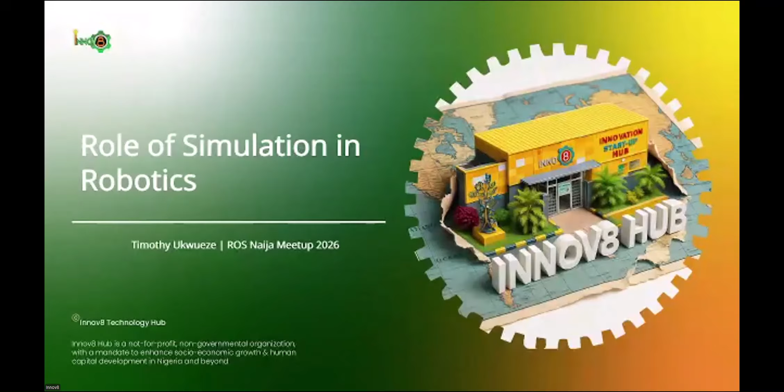So robots and simulation - first let's define what a robot is. At Innov8 Hub, the way we know robots to be is any device or machine that we build that can do the foundational paradigm, which is sense, think, and act. That means the robot should be able to perceive its environment, internalize that data, and make decisions based on the instruction given.

We also have simulation, which is not just tied to robotics alone. A lot of industries use simulation, from the automobile industry to construction to biology, like people in the medical field as well. We use simulation to model, test, validate, and get results.

But we're not talking about other kinds of simulation today - we're talking about robot simulations. As you can see, we're going to be covering some of the experiments we've been doing in the hub.

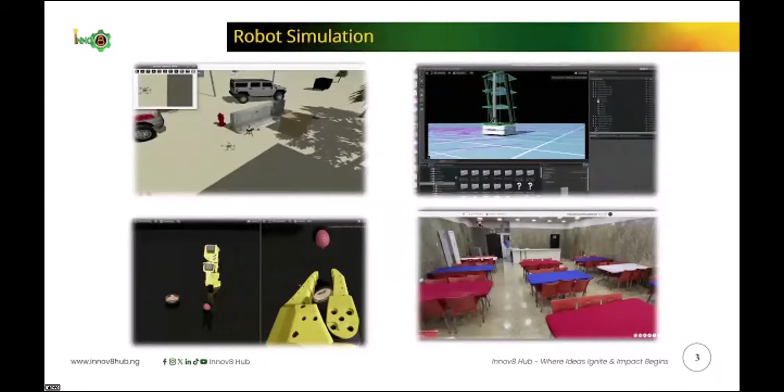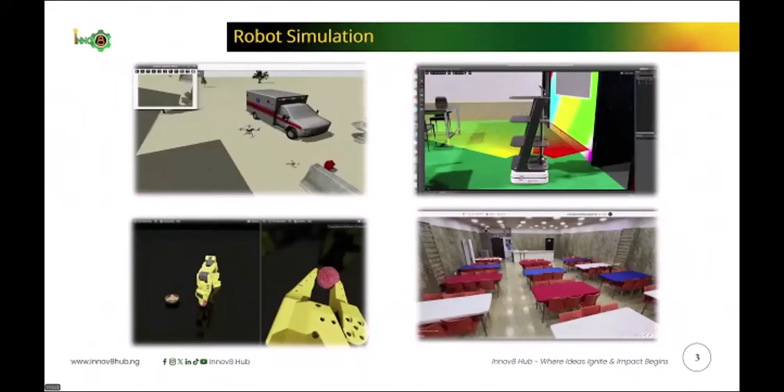Just to give a brief bio, I'm currently leading a simulation lab at Innov8 Hub, and most recently we started getting serious with robotics. Prior to that, we've been experimenting, so while I'm talking about the role of robot simulation, I'll be sharing some of those experiments with you.

Now, learning robotics - this is a meme I had to find because when I first saw it, I thought this is perfect. You see, this is the roadmap for almost every wannabe robotics engineer. The standard is: when you want to learn robotics, simulation is the easiest way to start. And when you start getting into mechanics and electronics, this happens.

Hardware is hard, and software is even getting more soft because of AI. So we are at that era where most people do this. How many of you are in this area right now? Don't worry if you are in that part - after this presentation, maybe you'll be going forward regardless of how difficult it is.

So before I move on to that slide, what I want to establish here is that it's pretty much easy to learn robotics using simulation. Why is that? Because, one, in Nigeria today it's even hard to get the hardware components. Maybe it's not about how hard the component is, but the time and money to get it to practice - that's a problem.

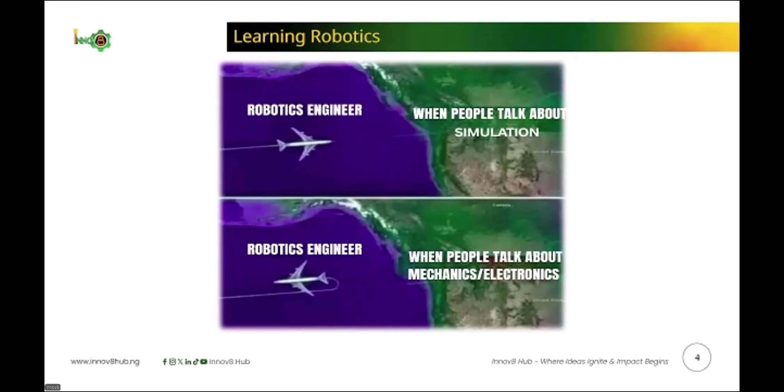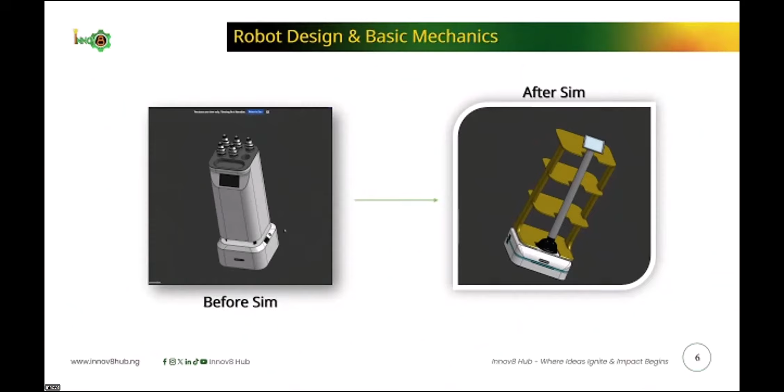I'm going to give you another scenario. This is another robot we were trying to design, similar but bigger. If you can see the older design, that was before simulation. The older design had that one caster wheel in the middle, but when you're scaling to this kind of platform and size, you find out that you have instability in the whole system. Now, as a good designer, you might intuitively know this, but you can actually validate it in Gazebo. We did. When we tried simulating this in Gazebo, we started noticing this wobble, showing us this is very unstable. That's why we went for a design with 4 caster wheels instead.

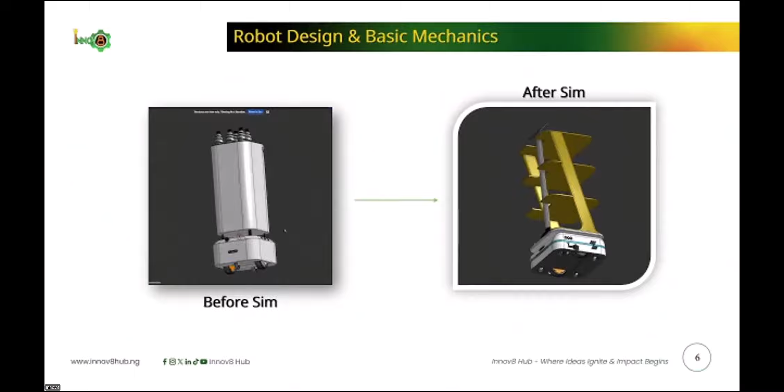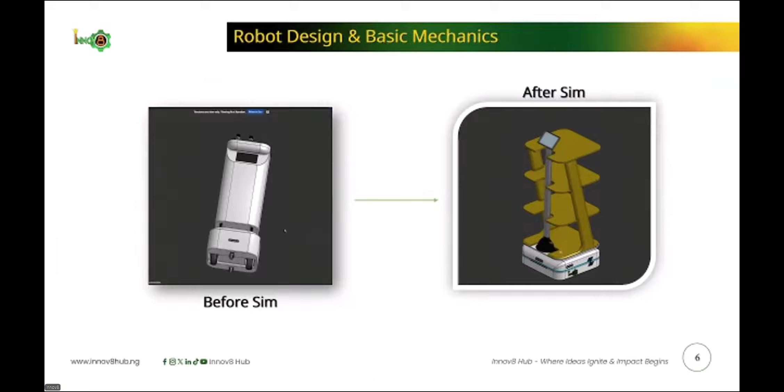So let's think about this. Maybe you were going to buy your components before doing this simulation. You've already selected 2 casters. You've already made a mistake. That means waiting for another 2 weeks if you're ordering from outside, or needing that specific size. So that's why for us in this part of the world, we need to be critical about the way we design, and we need to use the simulation-first approach. Okay, I'm not doing this fast enough, but it's okay.

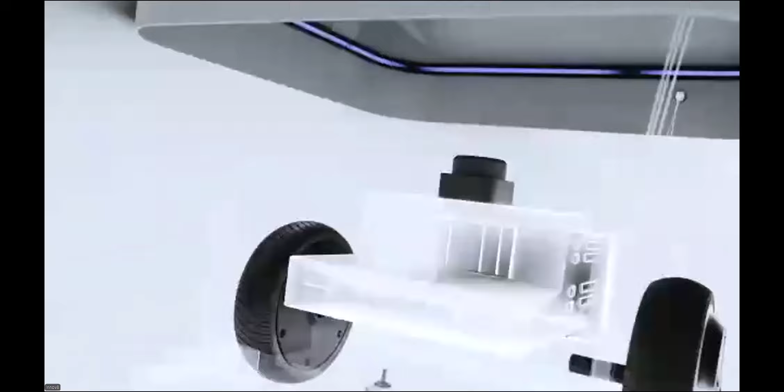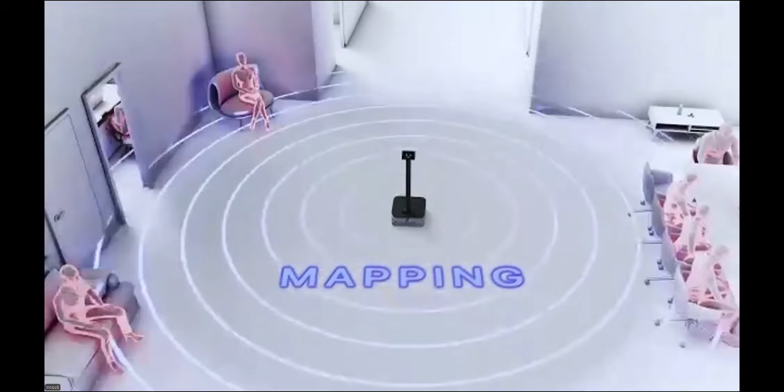I really wanted to show this video because it was an animation made by my team. We're introducing our robot that we designed specifically for office service activities. It's going to be a research platform, having different things that we're going to be testing, scenarios and what have you. It's going to do catering, patrolling, any function we can get out of it for indoor services. So you can have different modules for the payload.

Okay, so now, when you've built your model, robots are meant to interact with the real world. I mean, they're supposed to function in the real world, right? So in simulation, you can actually create that world and test those scenarios. That means you are not limited by the physical, you can actually go and explore.

And that next stage is where you actually start looking at world building in your simulation. This is one of the roles that simulation plays, where you can test all the interactions that you want to see in the real world. This can also inform you in a lot of ways, like sensor choice, height, position, what have you, because you need to validate all those things.

I mean, you can do it while you're buying your component, but I think simulating up to this extent might help you make better choices on the kind of components to get. Even the FOV of all the cameras is important to your scenarios.

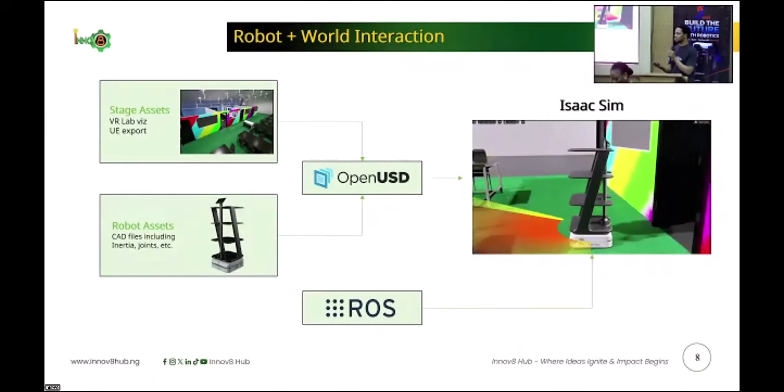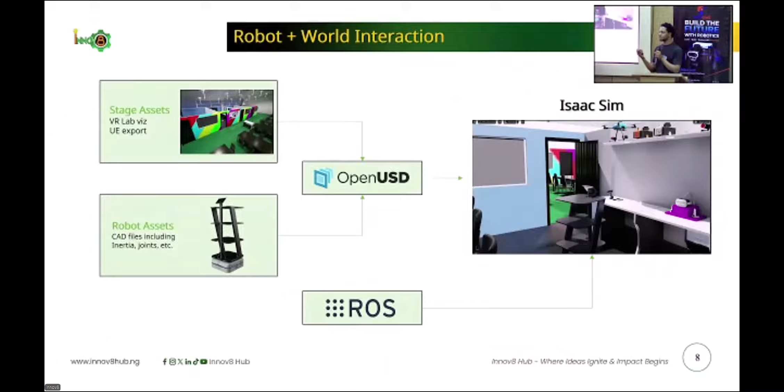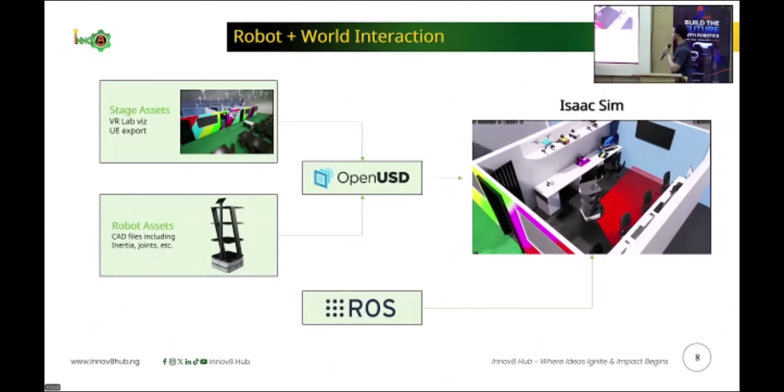This is also to tell you ROS is very important, because it helps you. The reason why they call it a plumbing system is because it actually helps you connect all the parts of your systems together, so it creates that network for you easily. That's why even if you're using Isaac Sim, most likely you have to use ROS to do your communication. So for control and everything, we use ROS. And so we'll move on to the next.

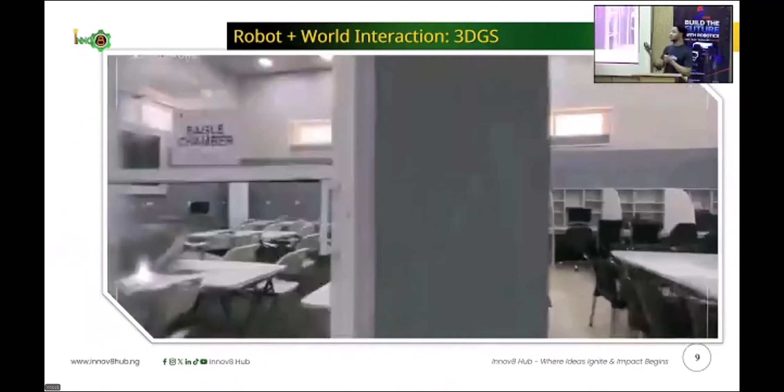All right, for world building, there are multiple ways. I mean, you saw one way, which is using already built assets for different use cases. You can model it by hand. You can actually use already made assets for different purposes and repurpose them for robot simulation.

But a new trend that is coming out is using 3D Gaussian splatting. It's a neural 3D reconstruction method, and this can quickly get you from taking pictures and scanning your environment to bringing it into simulation real quick. This actually opens the door to many things, because before we had to handcraft environments, assets, and stuff like that.

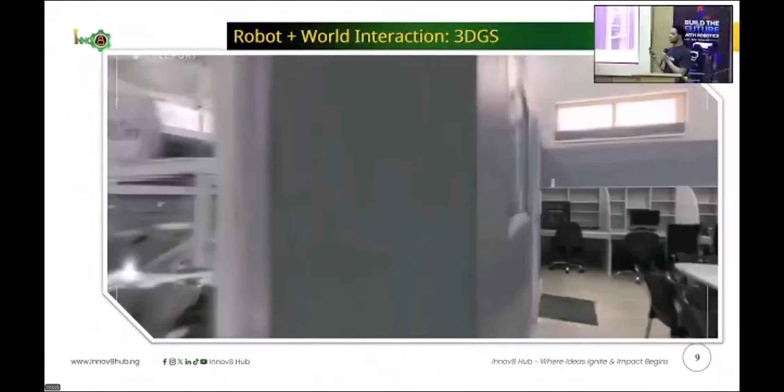With this, you can actually scan and get your world working in 3D. While it's still in the early stage, there's a lot of experimentation with regards to physics, lighting, and what have you. People are trying to see how they can utilize this method, because you want to be fast in your iteration cycle.

Yeah, so it depends on your inputs. The result you're going to get depends on your input. So if your camera is bad, you might not get a very good result, but you might get something ideal. Depending on your use case for Gaussian splatting, you will choose what device to use to capture.

You can use your iPhone, you can use a tablet, you can use specific devices, there are 360 cameras you can use. You can use high resolution cameras and stuff. Then there are specific cameras that have been built for 3D Gaussian splatting that you can actually get if you're feeling so rich.

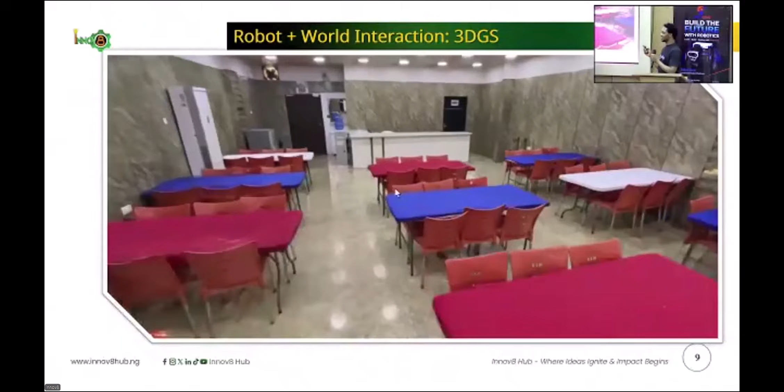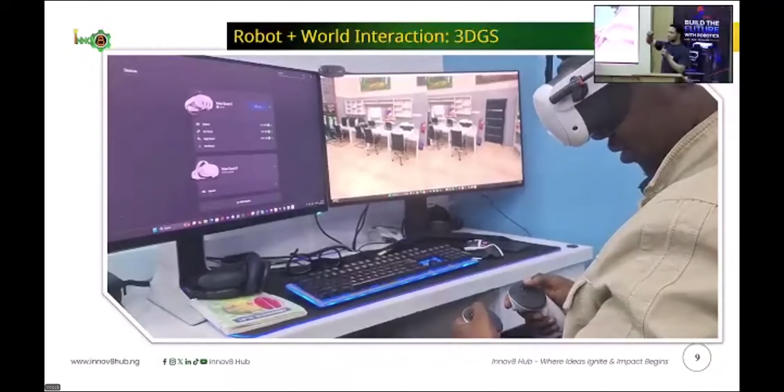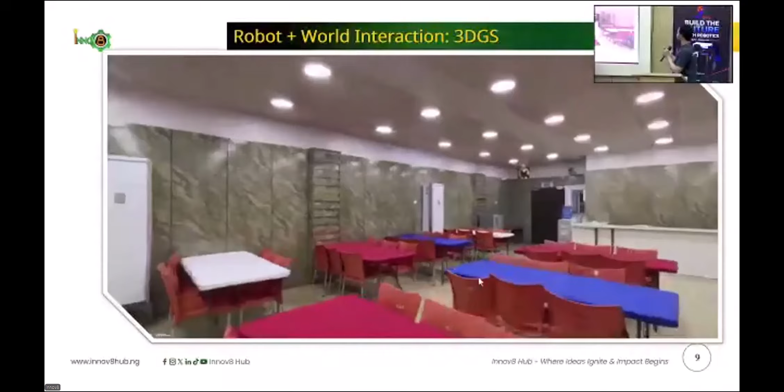Yeah, okay, for this one we used an iPad Pro to capture this. It was just a quick test. These are spaces that exist in this hub. The other one you saw was a cafeteria, while this one was one of our main spaces. It used to be the drone area, but it's okay. Well, that's basically it. There was a point I wanted to make, but I think it's okay, we can just move on. Maybe if I remember, I'll talk about it later.

So another use case, simulation - there's this AI trend, or hype, but there are real uses we've found for AI in robotics. We're seeing how it's enabling a lot of things, from perception to motion and whatnot. You can see here synthetic data generation, where you can maximize data collection in simulation.

Normally, gathering this data in the real world takes time, right? But now you can actually generate this - create simulated data, and annotate it. So you can start getting your dataset, training on the data you've gotten from the simulated world. You can even combine it with real world data to maximize efficiency. This has allowed us to scale AI training.

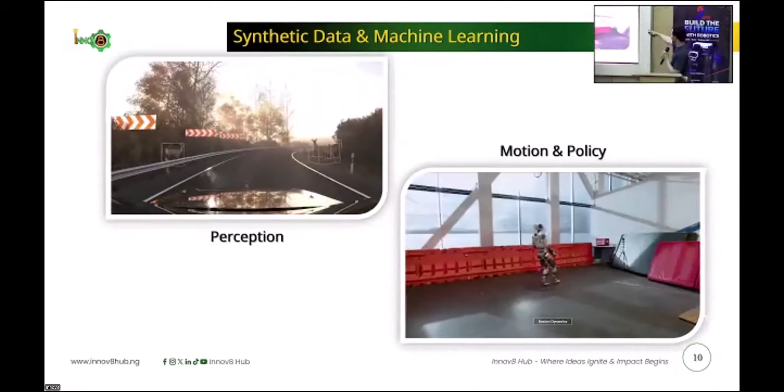We also have work for motion, where we talk about imitation learning, reinforcement learning, and all that stuff. You can see some work being done over there. With this, you can actually scale training - you can see this humanoid robot with multiple instances of it in training and simulation. This is how we scale. Something that would take like a billion years if you were testing with hardware will take like an hour using this framework. This is what simulation is doing in robotics today.

So AI has made simulation more important. If you're going to build an AI robot, most likely you're going to be using a simulator to train your models. I've never heard anybody say they don't use simulation to train AI for robots. I mean, there's a sim-to-real gap, where transferring all that learning to the robot is not so easy, because even though we can get enough of the physics and stuff, we cannot really ideally recreate real-world physics. The imperfection of the world, the imperfection of sensors, and all those things cannot really be created perfectly in simulation - that's where the gap exists.

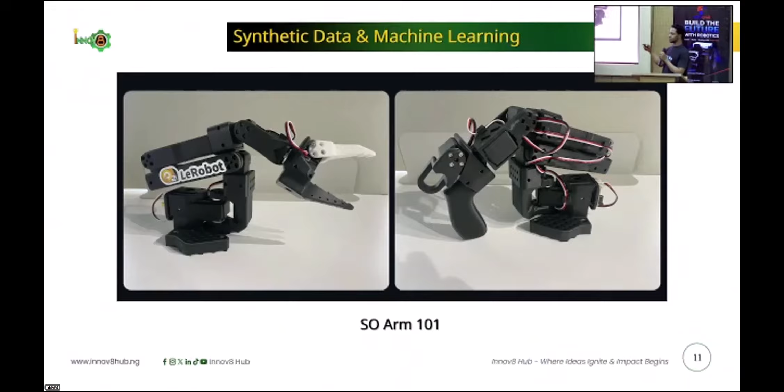So we are actually exploring things using this as well. You can do imitation learning, reinforcement learning, and all that stuff. So yeah, deployment - sim and real. You cannot be a perfect roboticist without having to deal with the real world. So you need to deploy, right? You need to be like these guys who keep going towards the hard problems to solve this.

So how many of you are willing to take this leap of faith? All right, anyway, so deployment - sim and real.

Okay, so there are ways to deploy, and you want to keep having your simulation in the loop as well, for multiple testing and whatnot. For instance, when I was trying to get into ROS 2, I built a platform for my own development, which I suggest everybody should do. You should not waste time taking too many tutorials - you should have a plan for projects you want to do and start working towards it.

Build something, maybe a miniature size or something like that. ROS allows you to use ROS 2 Control, which is like a package for interfacing and controlling your actuators and a whole lot of stuff. It offers the ability to have two-way communication between your simulators and your real robots. So you can easily test your ROS code, then test that in simulation. If it works, you deploy to the real robot to test as well. This is basically how this was actually done. So for deployment, always keep in mind that building in simulation, your end goal is to build in the real world as well.

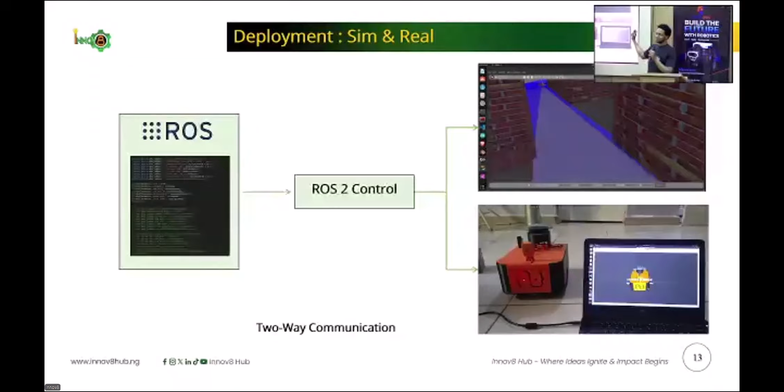There's a question on the Zoom chat: what is the headset and controller for in the 3DGS section? Just like any virtual world, virtual reality is a way to be fully immersed in a virtual world. We used it because 3DGS can be very lightweight for VR exploration. We just tested that in the demo. That was just a test for immersion, nothing to it, no robotic stuff.

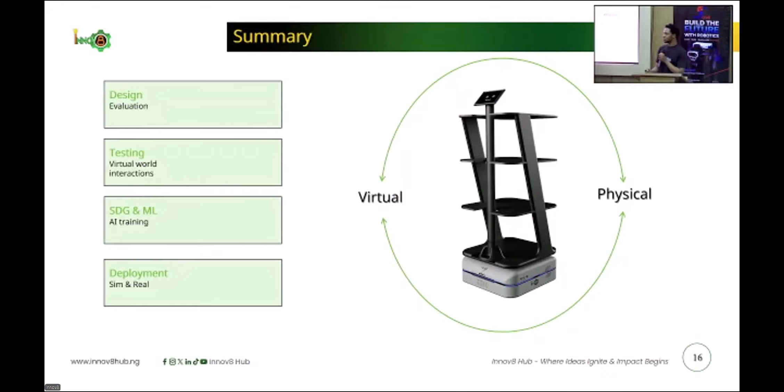All right, I think we are almost at the end. So, in summary, we've seen the role of simulation in multiple areas: design evaluation, testing as virtual world interactions where all your scenarios and behaviors play out, synthetic data generation (SDG) for machine learning, and deployment as well. You can see how important simulation is and the role it plays in the world of robotics even today. That is the end of my presentation. Thank you.

So are there any questions, or should I ask? Okay, all right.

I wanted to ask, because you showed a scene with a lot of robots, many. Have you done anything related to the genetic design of robots? It's similar to that improvement you showed with the simulation, where you have multiple designs and then have them compete genetically. Have you done anything with GA? You showed an old and a new slide about a robot designed in-house, as well as another simulation with billions of robots working and interacting together. So has there been any work done here on that field?

Okay, you mean AI learning or just the design? Both, in any sense. If it's AI, we've not really done specific projects that look like that. We're still exploring these arms for AI training. Also, most of the workflows are basic at this point, so we want to flesh out how to actually build the workflows, and then get to the point where we have all of that.

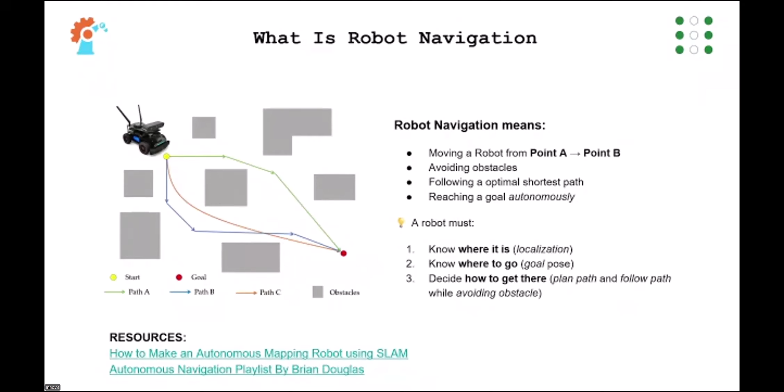So now Navigation 2. If you remember earlier, I told you that ROS has libraries, or what you call frameworks, groups of libraries, frameworks that make a lot of your project building easier and faster. Just like you have several libraries.

So this is a framework for robot navigation in ROS 2. It has all the things you need, from mapping to localization to path planning to path tracking, and it has docking too. Do you understand? SLAM - how many of you have heard of SLAM before? Good, so it has all those things. What it usually requires is setup, then test, then tune. That's the ROS 2 navigation stack.

So now these are just examples of 2D robot navigation in the real world, and these are things I have tried. These are two projects I have worked on. This one was by my right, sorry, that one. Sorry, I don't know, it's a bit dark.

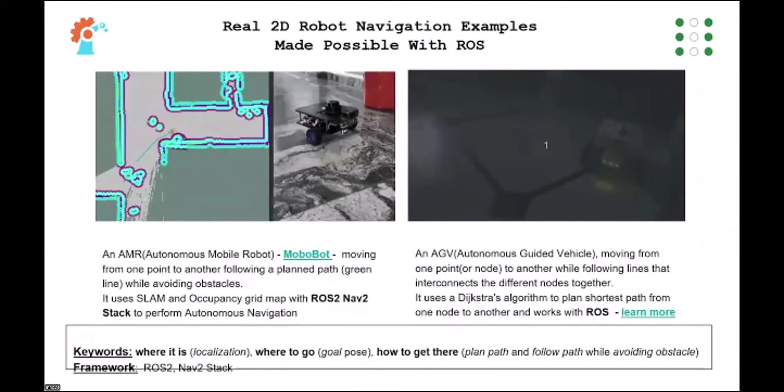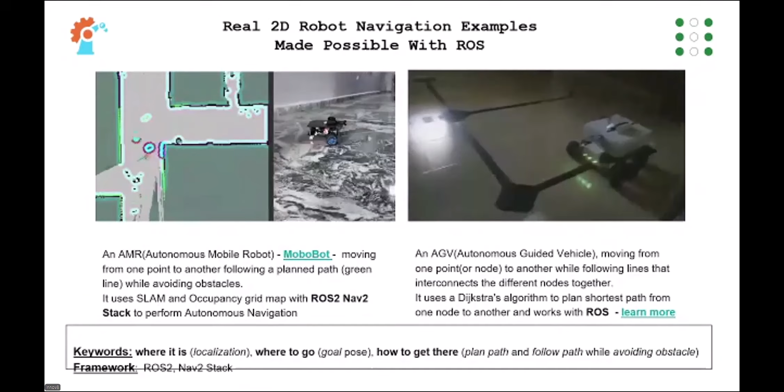So if you notice, we are used to line following robots. I want to use this to explain before going further. Now this is point A, B, C, D, E. I'm telling the robot to move to point E. The robot knows currently it is at point A. So who can tell me where the robot is now? It's between where? Yes, localize - localization. So it knows, I'm between point A and B. Now I'm at point B. Yes, I'm between point B and C. Now I'm at point C.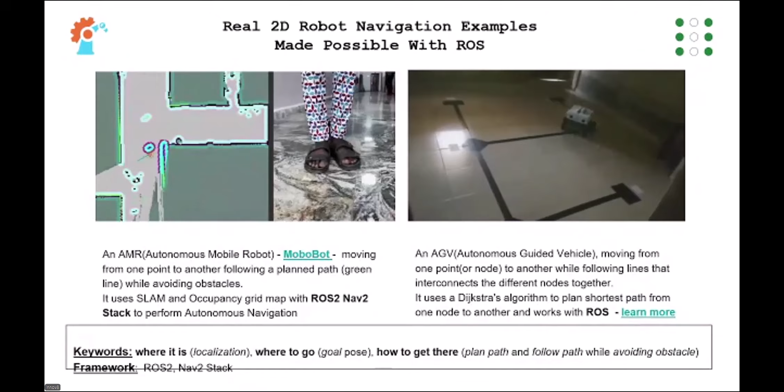You can see now that the map, for a line following robot, is the map you develop yourself. It is what you put there - that's what the robot knows. And it can follow the path, you write your line following algorithm. Now it works with a Dijkstra's algorithm that plans such paths, using it to know where to go, the shortest path from node to node.

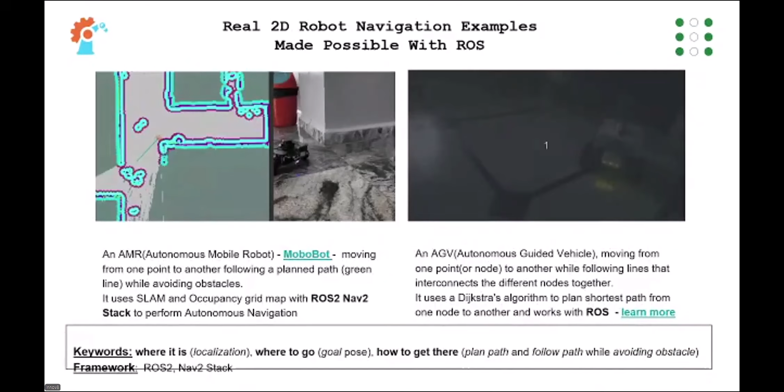So this is a much simpler way of navigation, but this is where we are going. Both of these were done with ROS - that's what I want you to understand. Now this is where we are going: the autonomous mobile robot using the Nav2 stack. You can see now we are looking at what's called an occupancy grid - a 2D representation of your world using grid cells.

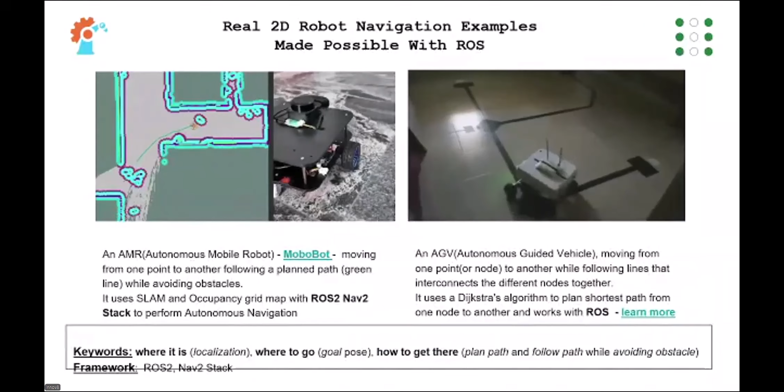I'll round off now. A 2D representation using grid cells. And you can see, like I explained with localization, it knows the point X, Y, and theta. Theta is the orientation, I told you how the robot is - it knows those points, that's one. It also is able to avoid obstacles, creating the map and navigating. So this is like the concept of robot navigation.

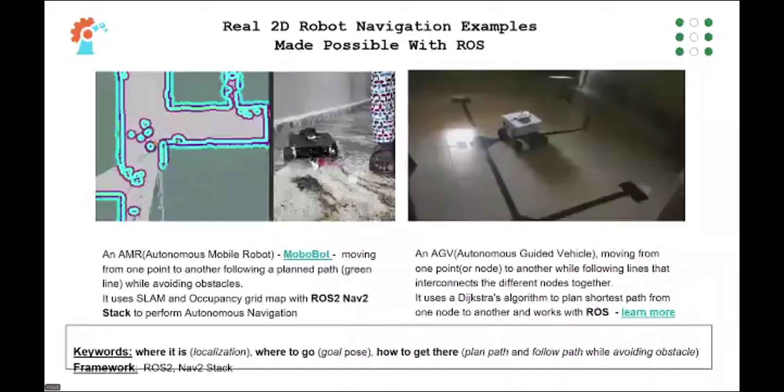Now, if you try to do this and want to write your code yourself from scratch, like I said, it is you and God. And that's the beauty of using ROS. So that's the basic navigation flow.

Yeah, and this is at a high level - navigation is wide and deep, just to talk about it, but this is just the basic idea with the help of Nav2. You can start by easily doing mapping - you create your map. During the process of creating it, you can navigate while mapping, and save the map as an occupancy grid or pose graph for those doing SLAM. Then you can start navigation, test your localization quickly, run the navigation, plan a path, avoid obstacles, move the robot autonomously, and finally you might need to tune the parameters based on your specific robot's shape and the behavior you expect from it.

Because of time, we won't be able to go too deep, and quickly we'll just be doing quick tests with the robot. Now, this is MoboBot, a ROS2-powered mobile robot that was developed at Robocre8.

Have any of you heard of TurtleBot? If you have heard of TurtleBot, just raise up your hand. Okay, one, two, three. Okay, so this is a Nigerian TurtleBot - that's what I'm saying.

Yeah, so this is the Nigerian TurtleBot. It's for autonomous navigation, and actually people are using it.

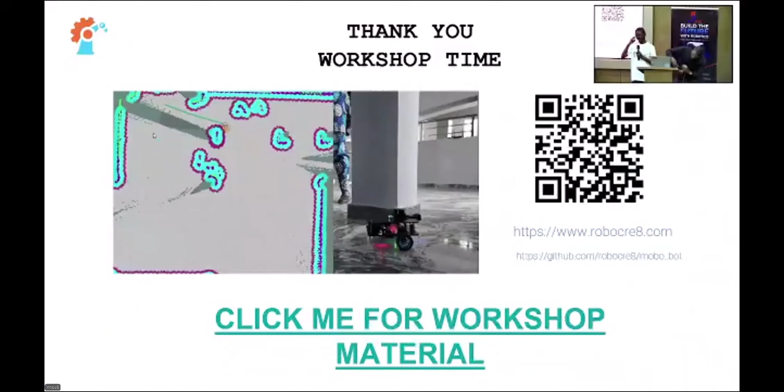Look at my USB. Yes. Okay, so we just want to do a quick test and a quick workshop, and we sent some... that's why we sent that particular link out. So I don't know, did anybody even try? Did you get the link? Did you try it? Nobody tried it. Nobody. You didn't get the link? Around 25th. How do you know if it's good?

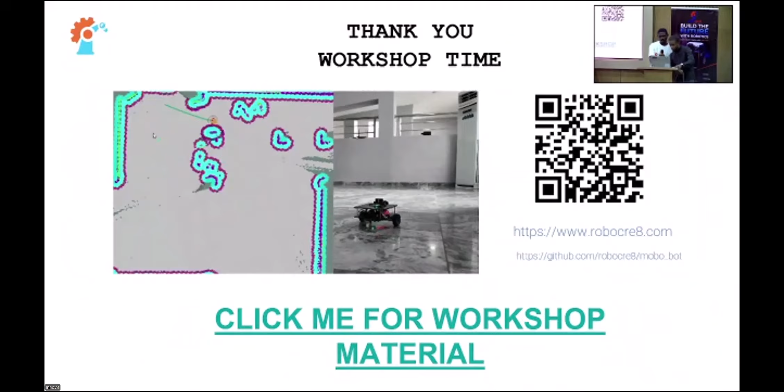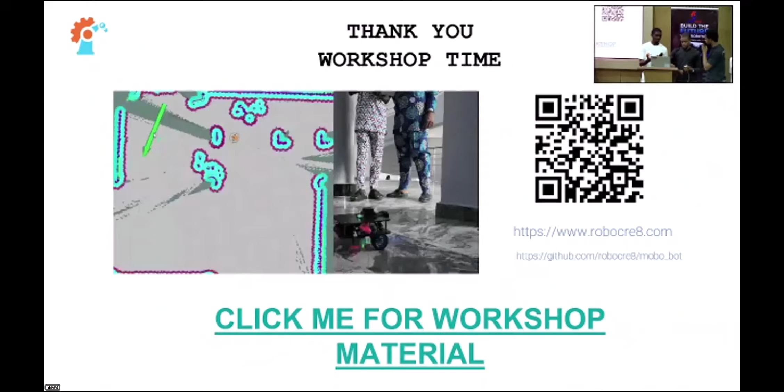Let me just check. And it should not affect this. Okay. I'll just do it physical. I want to see if I can make it. I should just do physical now. No problem. Okay, so, okay, no problem. You can just drop it on the ground and on it. Just drop it here.

So I'll see if I can connect, and I don't know, I'm going to show you. Okay, good, we are connected. I'm trying to connect to the robot. I'm going to show this. And there's no HDMI - they can get HDMI, maybe I won't. Let me exit there. Okay. Please open, please open, please open. Okay.

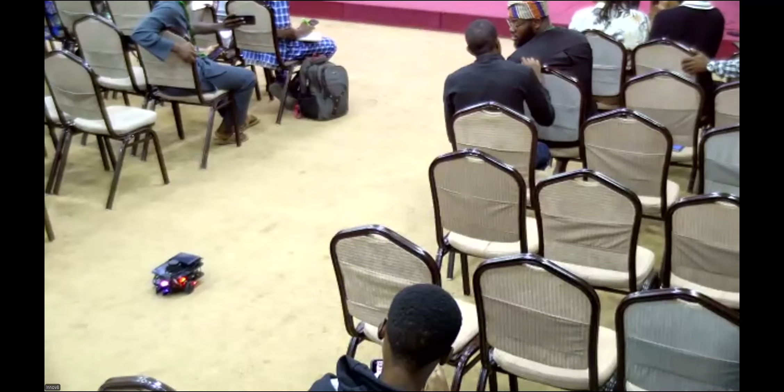Yeah, thank you very much. So I just want to send it towards that end. Do you understand now? Once I do it, please move around me a bit, move it around a bit.

And that's the beauty of ROS 2 and also hardware like this, because now you have a way of running your tests, mapping the environment, and tuning based on your use. For example, there's someone here, I think he's a moderator, who was working on his master's thesis. He needed to do some navigation and things like that. The world has gone away from obstacle avoidance using ultrasound. I hope you're aware of that. You understand what I'm saying? And the world has gone away from that era, and that's why we're also introducing ROS to you guys.

You actually have to stand in its way completely. It's better you stand in its way completely. Exactly, because of the LiDAR. Do you understand now? Thank you. You can stand at its front anytime.

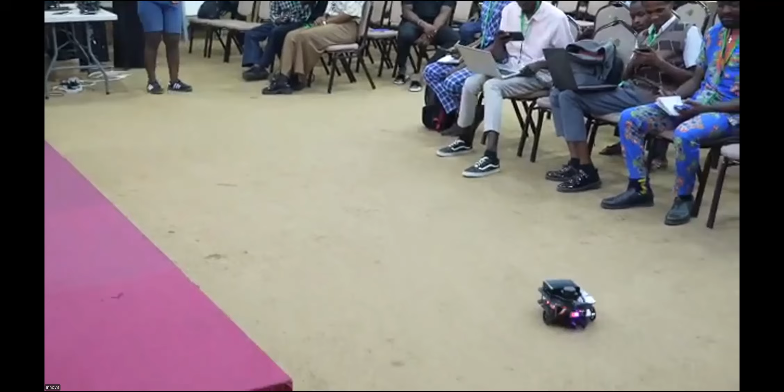So what we are saying is this: while we are advocating for ROS, the world has gone beyond just normal Arduino and all those things. So it's time to start exploring simulations and real hardware. Do you understand now? I'm building something, because when I went to Singapore, I had the opportunity to attend ROSCon Singapore last year. I also made a presentation of this in one of the lightning talks at ROSCon. You can check, I'm online for that.

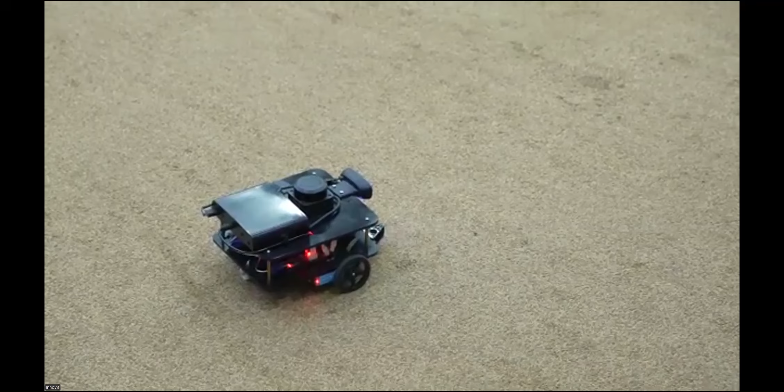So one of the things you will notice is that there's a lot of all these things out there. I went to the airport and you see robots autonomously moving. And if we don't start getting into this early, you understand, we'll be left behind.

Beyond simulation, what we are here to tell you is that ROS offers you what? Go into simulation and test your ideas, and you can also do it in real life. That's the summary of the meetup today. Do you understand now? And we are trying to see that we have that ecosystem where people can learn these things, both from simulation to real, and start developing autonomous robots, at least to solve a lot of our problems, navigation and the likes. Do you understand what I'm saying? And all these things are made possible with the robot operating system framework. You can start trying it for your final year project. Use it, tinker with it.

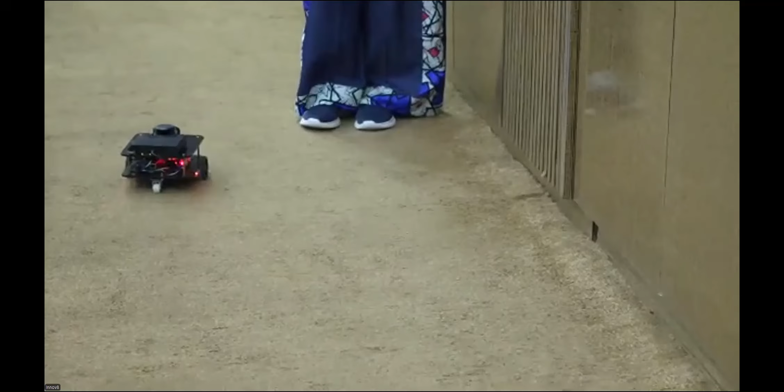You understand? It's fun. I think I would have loved to do quite some things, but because of time, I might just have to stop here. I wish you could see a lot of the things, the visualization, because I wanted you to see the visualization of the mapping, the localization, the path planning. It kept planning paths, that green line you keep seeing, it's planning the path, avoiding obstacles, and all these were possible with the navigation stack. Do you understand now? It's already prepared, it's just for you to now start using it.

And even there are frameworks also for, I think there are framework data sets for those even interested in normal autonomous driving for actual cars. Do you understand what I'm saying? ROS has a framework for that data set and things you can start playing with. But that one with simulation, like you explained earlier, you know that you have to have good laptops. Do you understand what I'm saying? So I'm going to just bring it back to me so that it doesn't run away. Do you understand now? Yeah.

You can pass it around. This is the full map of the hub. Do you understand what I'm saying?

Yeah, so with ROS, it means you can do things like autonomous navigation, map your environment, go and map your office, your classes, do those things, tune your robot, and build robots that do something. Do you understand? So this thing is possible in Nigeria. Do you understand? Yes, it's possible.

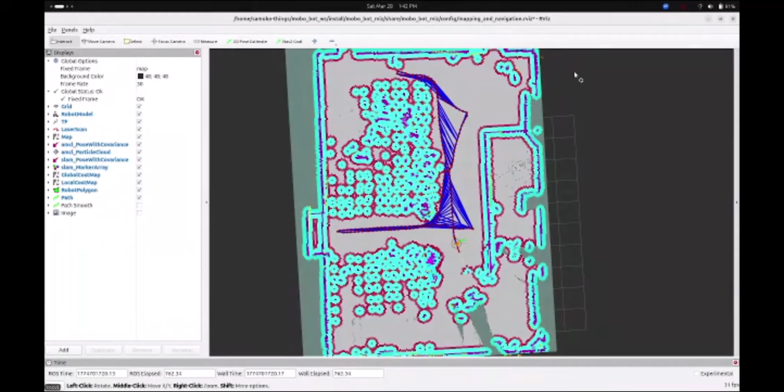Yeah, so thank you for the question. Like I said, navigation generally, depending on what you want to achieve, it's possible to go lower. For example, if I decide to maybe stick with only using a camera, I may not be able to achieve what you just saw now. Do you understand what I'm saying? So that's why it all depends on what you want to do.

That's where all this is. Do you get what I'm saying now? Yes, you can also, for example, now I know I told you about the mini version, which I told you about. It's like ESP32. We started integrating with ESP32 because of things like this. Where you can also do some of your basic ROS tasks, even Python, OpenCV, and AI live coding and things like that.

So we have that, if maybe the LiDAR or some of the things are scared people might not be able to afford it or things like that. So there's a mini version, but like I said, it depends on your task. The major thing is, what do you want to achieve? Going low will mean, like I already explained, once I remove this LiDAR, everything I'm doing here, I cannot do it again. Do you get what I just said? So it depends on what you want to achieve. Then you can formulate your own type of problem statement around it and see possible sensors you may be able to use to achieve that.

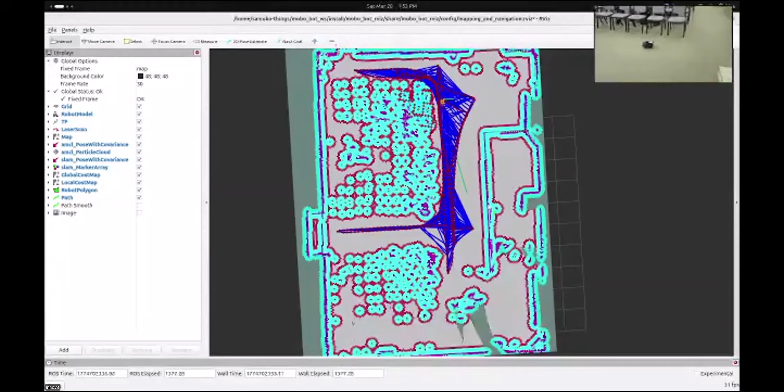Thank you very much. Those of you online, apologies for not being able to see a lot of the live demo, but I'm sure you can see the map we've built of this hall. In the map, you can see some sky blue dots - those are chairs and people. You can see the red dots - this is our cost map. The red dots are part of the cost map, and the blue lines show the different paths the robot considered taking, eventually taking one of those paths to its goal point.

During his presentation, he showed you a page with those ROS 2 distributions where you were seeing things like Humble, Foxy, Jazzy, and all of that. I'm surprised nobody asked, why ROS 2? What about ROS 1? Nobody asked that question. Does anyone have the answer to that? Why are we talking about ROS 2 and not ROS 1?

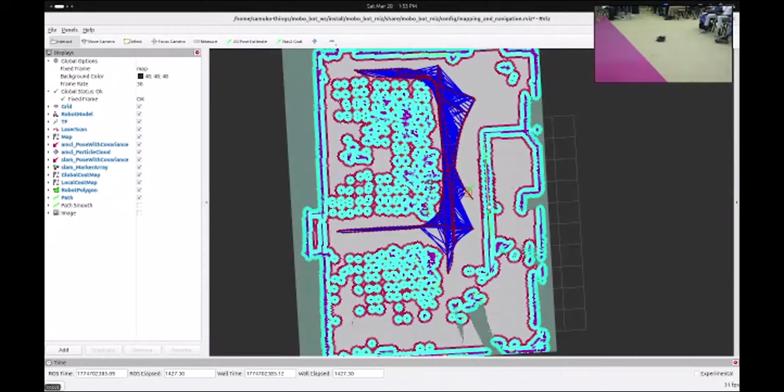Okay, thank you. ROS 1 is in the past. It's just like how you have Windows 7, 8, 9, 10, 11 - that's how you also have ROS 1 and ROS 2. For ROS 2, you have different distributions. Instead of giving numbers like Windows 10.1, 10.2, 10.3, in ROS you use names like Humble, Jazzy, and a lot of what you've seen there. ROS is a very interesting abstraction or middleware layer - like I said, it's not an operating system. It just connects a lot of things for you. With ROS, you can easily plug and play, take in and take out. You can connect almost any hardware to your robot, and it helps you control it.

Aside from that, it also makes it easy for deployment. If someone has already done a package, or as most of us are used to, a library to work with something, you just download it and plug it into your system and it works. You don't tell me that because my camera has stopped working on this robot, that this robot cannot map - it will still keep working. It's not like a lot of our programs where when one aspect spoils, the entire stuff breaks.

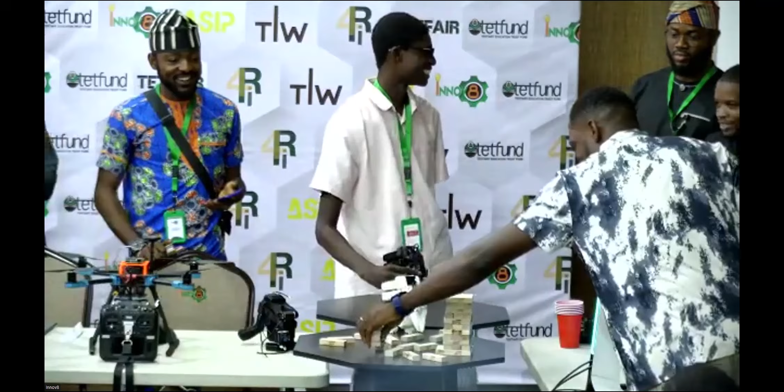Let it be on record that I had his back from day one. I can see a lot of doubters are not happy. They are just clapping and smiling, but they are not happy. Thank you. Okay, a lady next.

No, we'll reset the leaderboard. Okay, I have some good news and some bad news. Which one do you want first, the good news or the bad news? The bad news is that the leaderboard has been... we are now going with a timer. The good news is that everyone has a chance to be the winner now. So let's see, she has 1 minute and 4 seconds to win it.

Yes, wow, that's very smart. Yes, that's a hack. So the ladies have been hiding themselves, Abby. Open the gripper now, you have to let the gripper open. Okay, use your thumb, ladies, push it out with your thumb. Yeah, oh okay, go ahead.

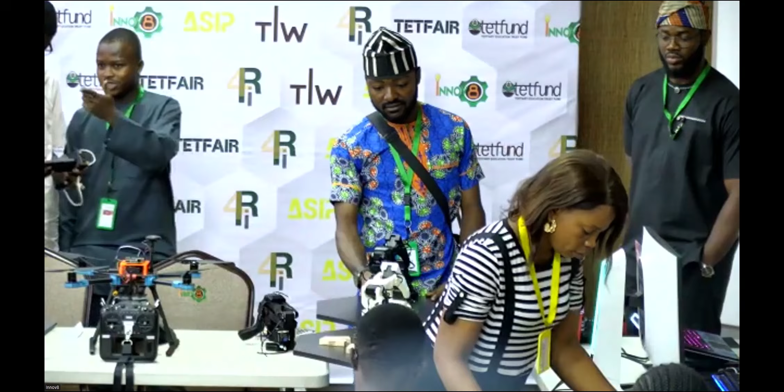All right, nice, you can try again. Not yet, nice. All right, your time starts. Are you ready? Okay, so this is not part of it for you. Are you ready? Yeah, your time starts now. 2. Good, good, good, that was fast.

Slow and steady, they say, win the race. Who cares about slow and steady when you have quick and swift? Don't mind me, slow and steady also wins the race, with the timer behind. Okay.

We have a new, wow, that's a new record. 4 stacks in 40 seconds. Wow, 5 stacks in 50 seconds. Less than 50 seconds, 5 stacks.

No, you're not allowed, you can't move that particular tile. You can, it has a twist, you can turn the neck. Yes, oh okay, we have a... the advantage of sitting there.

Bob the Builder, can we build it? He is actually a gamer. We have 6, oh my. So where's Yusuf? Your record is being shattered in record time. 5, 4.

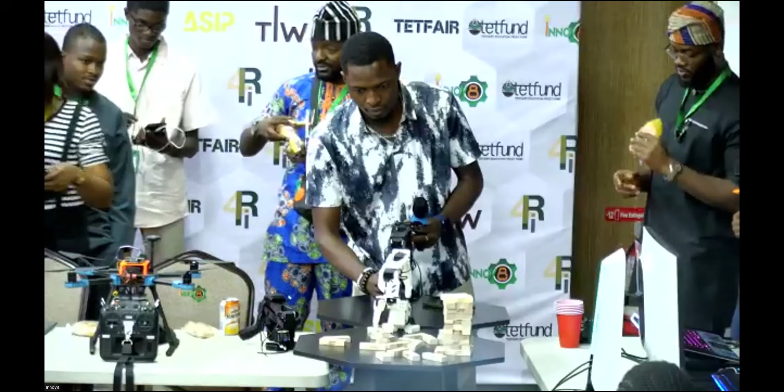Okay, where's the timer? Okay, wow that's good, 3 tiles in less than 20 seconds. 4 in less than 30 seconds, good.

No, they are familiar with all the controls, that's why. 5. No, he's an unofficial contestant, so don't worry. 6. 40 seconds left, and he has 6 tiles already.

Okay. So like I said, connect, interact, network. Wow, that's 1, 2, 3, 4, 5, 6, 7 tiles in 1 minute and 10 seconds. Wow, 8 tiles in 80 seconds. 9 tiles in less than 90 seconds.

3, 2, your time is up. Thank you. So he's unofficial, so he's not going to be on the leaderboard, don't worry. So the record to beat is 6. Wait, is it 6 or 5? 6? Okay, the record to beat is 6.

Okay, go ahead, are you ready? Okay please pause, no he has not started. Start.